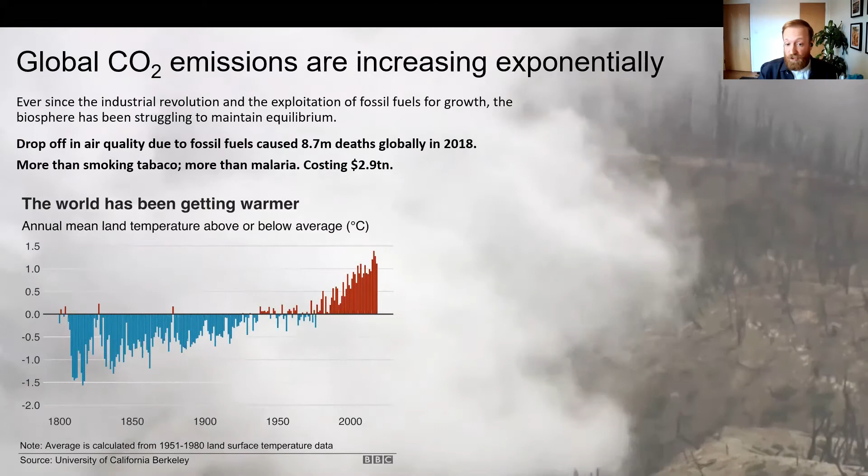When we talk about transport, this can be anything from personal transportation, so how you get around in your car or on public transport, all the way up to your international flights for your holiday in aviation, but also freight, so on the roads through heavy goods vehicles or in international shipping.

Because of this big problem, because the government is signing up to these ideas of reducing emissions, the UK industrial strategy has 4 grand challenges, and one of those has been set as the future of mobility.

Through the future of mobility, we're looking at exploring reducing emissions through new technologies such as lithium-ion batteries and hydrogen fuel cell technologies. Ultimately, we're trying to set the UK as a science superpower in these novel electrified technologies.

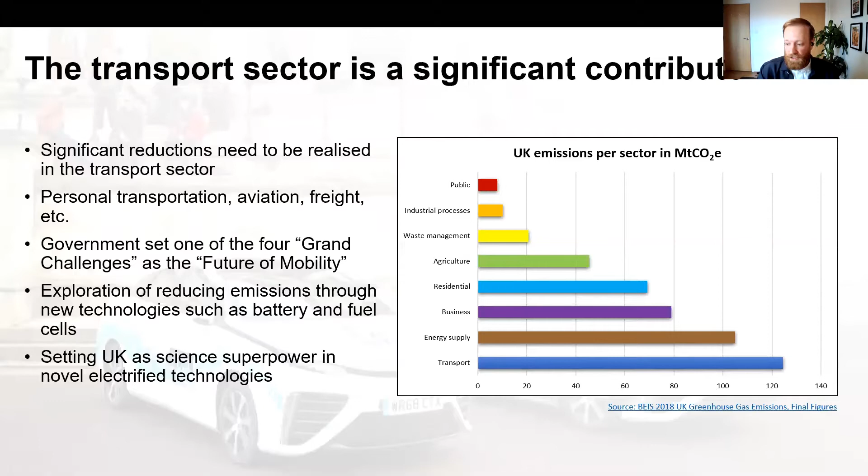I think sometimes we can be quite critical that governments aren't doing enough, but I think we're in a good position in the UK where the government is getting behind these ideas.

We can see that in November 2020, just last year, the Prime Minister announced his 10-point plan for a green industrial revolution. This is 10 pillars of activity that can help us reach net zero targets in 2050. This shows that the eyes of the government are on this issue.

So here I've picked out some quotes from the document that are specifically related to electrification of the transport sector. Some of this you might have heard of in the news recently. There's the ban in 2030 of petrol and diesel cars.

This basically means that in 2030, it will be illegal to sell cars in the UK that are 100% powered by petrol or diesel internal combustion engines. They must have some kind of significant hybridization. So plug-in vehicles will be still available and full hybrids, which is a great first step.

And then a close target after that of 2035, every car sold in the UK must be 100% zero emissions, so have no internal combustion engine whatsoever.

Some of you may think, well, this is a long way away, 2035, we've got lots of time, what's the worry? But if you know how the automotive industry works, if a car company, just pick any car manufacturer, is designing a new vehicle, it will take 5 years or more just to design their new latest model of a car that uses their conventional petrol and diesel engines, where they don't have to think about a new technology. But now they're going to have to think of what's the power source of the future, what's the propulsion system of the future, and do all this in a very short amount of time.

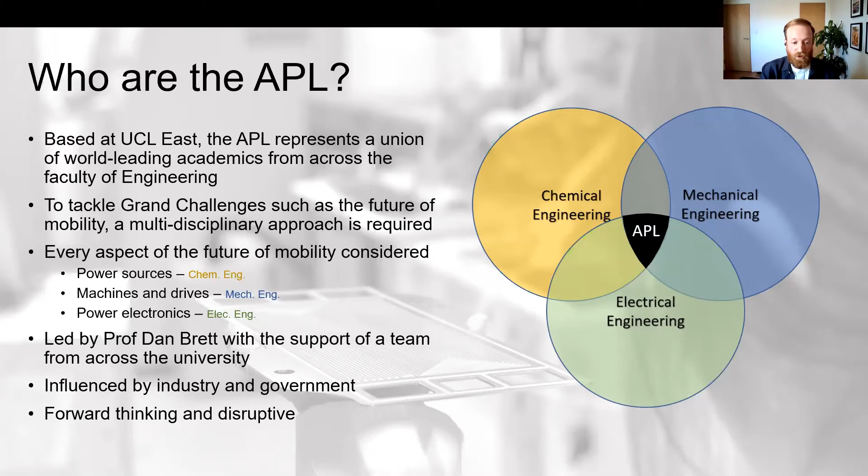And the final point, it wouldn't be UCL if it wasn't forward thinking and disruptive.

So I hope that gives you the overall view of what the problem is and how we're trying to answer it. Now we'll do a bit of a deep dive into some of the technologies that we're currently researching and scaling up at the APL.

As mentioned previously, hydrogen fuel cell work was my bread and butter. This year is my 10th year looking into this research, which makes me feel old, but this is the stuff I get excited about. So we'll have a bit of a deep dive here, strap your thinking cap on. I promise it won't get too technical.

So there's no burning. It's a purely electrochemical energy conversion device. In the middle, you have an electrolyte membrane, which is a polymer, so it's a plastic material, and it kind of looks like cling film, if you didn't know what it was.

What happens here is hydrogen comes in from a compressed gas tank. If you think back to your school days, hydrogen is the most basic element and most abundant in the universe. It's just one proton and one electron.

When this comes into a fuel cell and meets the catalyst area, the catalyst is there to facilitate the reaction. The proton is split from the electron, and the proton can travel through the membrane, but electrons and the gas can't get through the membrane.

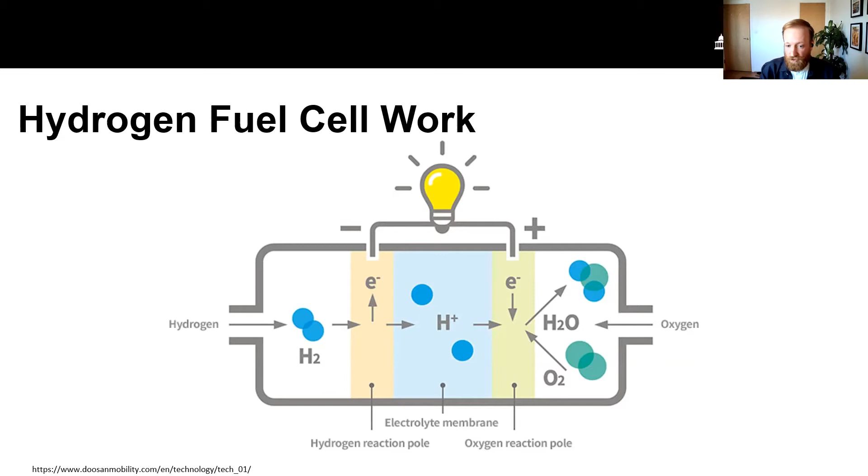And then we spray on either side a catalyst material. This is platinum nanoparticles suspended on a carbon sphere, which is a good way of thinking of this is you think of a black football and you've glued table tennis balls all the way around it. You've got an out of scale but representation of what a carbon sphere looks like with nanoparticles of platinum on.

This is then suspended in something called an ionomer, and we spray this onto both sides of the membrane to make a fuel cell.

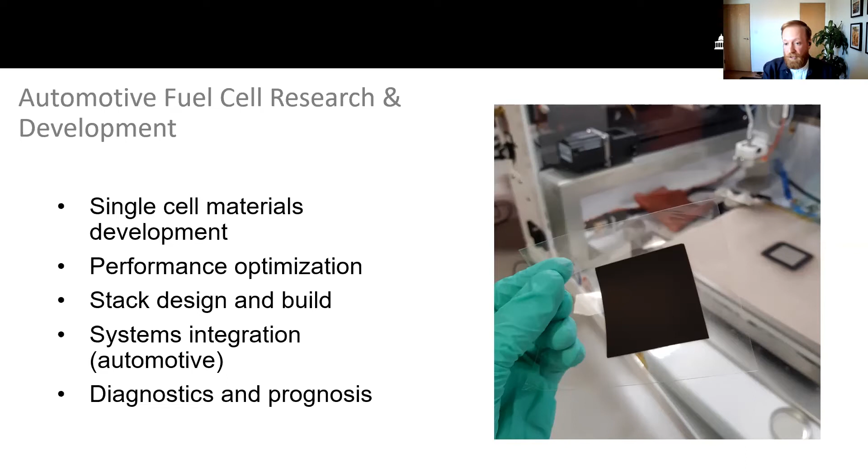So we stack these up same as slices of bread in a loaf to make more connections, and then that voltage that was less than 1 - in this application, where there's 60 or 80 cells, you can get around 60 volts.

And then when you multiply that by the high current that a fuel cell produces, you can then get, I think this one here is about 8 to 12 kilowatts in power. And that's enough to power everything in your home, from your TV, your lights, your kettle, electric shower, and that's how fuel cells could be used.

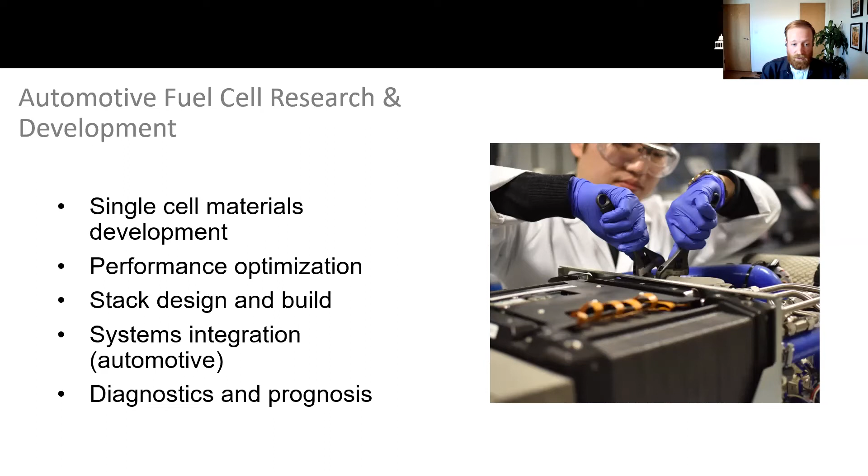The kind of the more global systems engineering level rather than the materials level, and looking at optimizing how do we get the gases in and out, how do we get cooling in, how do we optimize all the fixtures, and that kind of work is what we're quite well versed in.

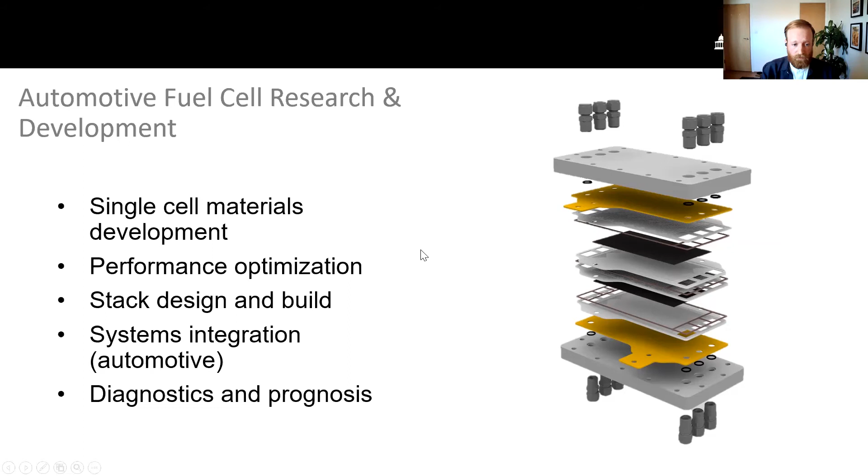Here we can look at scaling and optimizing the balance of plant. This includes the air compressors pushing air into the fuel cell, the hydrogen recirculation system, and the coolant. All of these subsystems that still aren't fully understood, we can tackle at the UCL East campus now.

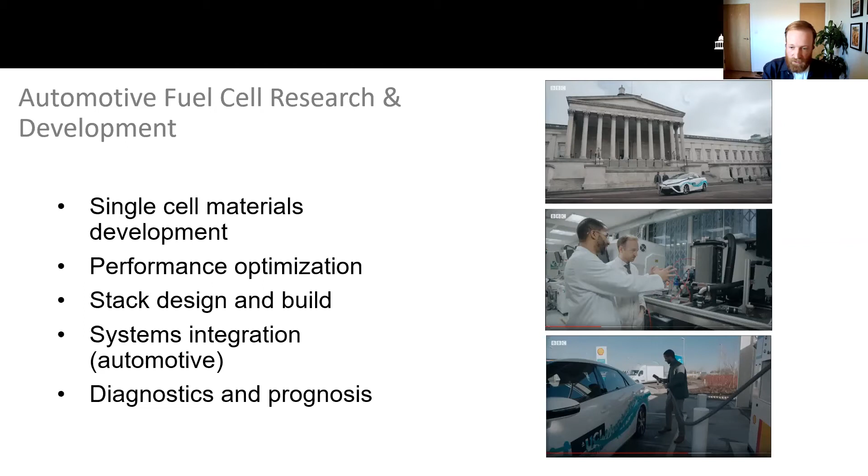So once we've gone from the materials level and built the optimized fuel cell, put it in an application, run it in a system, we also need to look at diagnostics and prognosis. Was the fuel cell running at its best? Did it degrade too quickly? Was it in the right environment? And what we do here is a lot of work with X-ray CT.

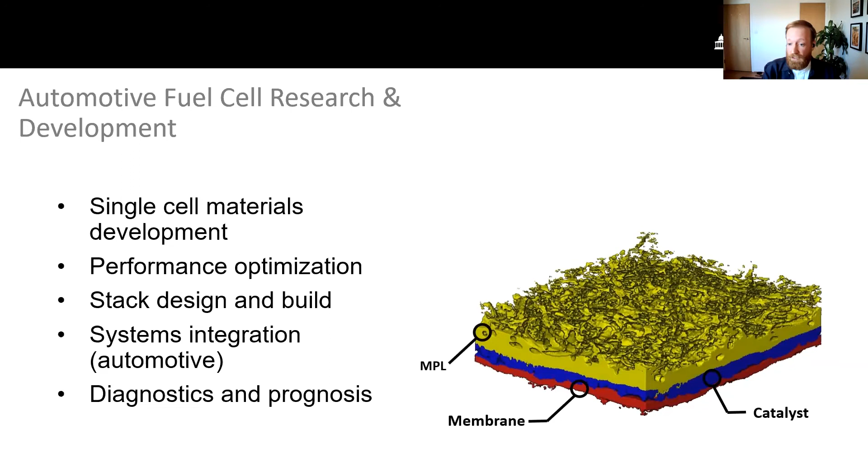So this is an X-ray scan of a fuel cell. This is a very small segmentation, I think it's about 0.5 millimeter cubed. This just shows that we can look, after we've used the fuel cell non-destructively, at the membrane material. Did this crack? Did it get thinner over time? Was the catalyst that we applied, did that move around or delaminate?

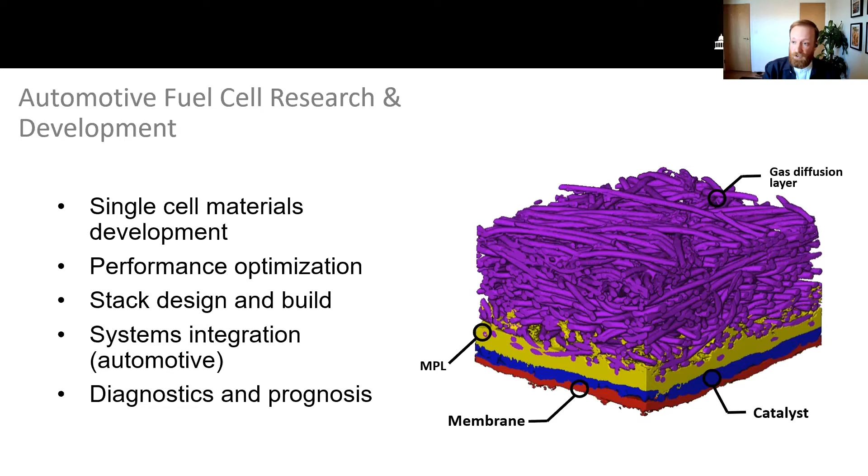And then this here is the gas diffusion layer, which is normally a carbon paper. This is how you blow gas over one side and it diffuses through the fibers to meet the active area. Did this crack? Was this over compressed? And this feeds the next generation, or the next iteration design, for the fuel cell of the future.

So to stay with that thought process and CT, I'm going to give a bit more detail of the recent work that we've done with CT, and a recent paper that we published.

So these next two slides with Homer Simpson, they're brilliant. They were kindly given to me by Dr. Francesco Iacoviello, who's in UCL. He's the X-ray guru, and this explains the process that we use.

Some of you might have come across this before, where you've heard of CAT scans or CT scans for internal medicine concerns, and it's used in the medical field a lot. It's the premise of using a radiation source, like an X-ray tube, passing through a patient in this case, and then at the detector side you can see what's happening inside. We use the same thing to look at what's happening inside batteries, fuel cells, and supercapacitors.

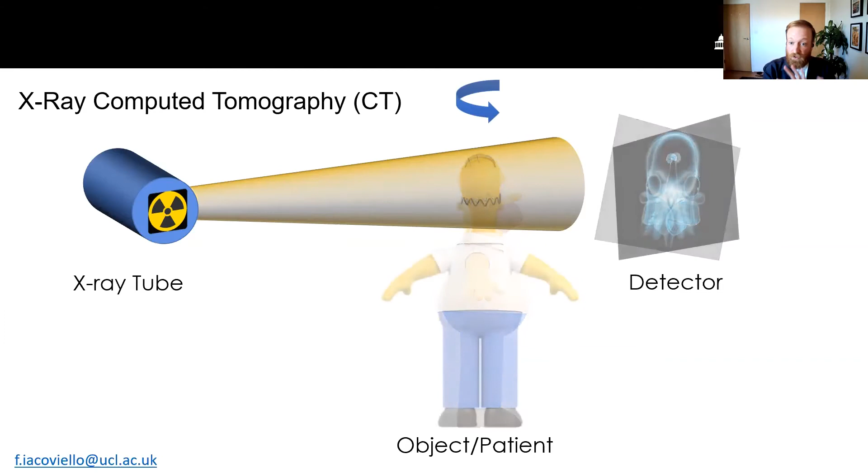But the CT part, so that's the radiography, that's one picture that you normally use for looking at broken bones. But the CT aspect is if you can take one image, rotate the object or patient, take another image, and do this through 360 degrees, you start to build up a lot more data.

Now in a medical context, the patient normally lies on a machine still, and then the machine goes around them. We do the same, but in reverse. So we have the machine staying still, and then we rotate the fuel cell or battery.

So once you've taken all these images, you've got quite a lot of data. We can then use machine learning techniques to reconstruct all these images in a computer environment. And then we have two different ways of looking at this data.

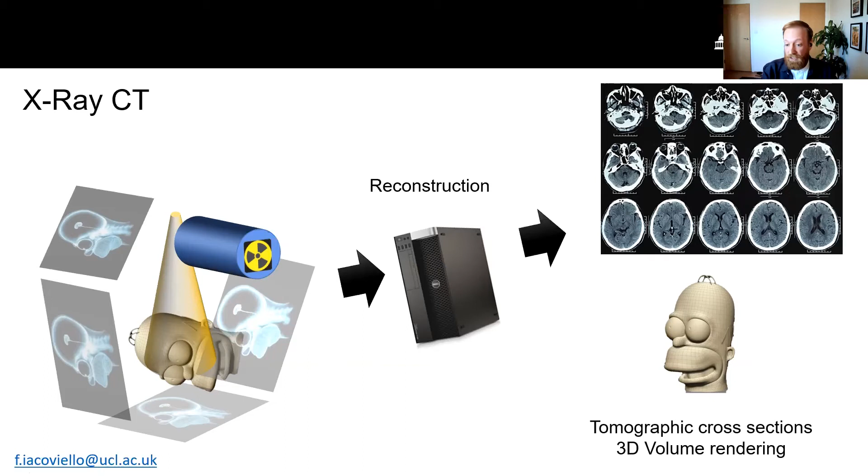So the top section here is something called tomographic cross sections. This is where you can look slice by slice through the thing you scanned, looking at the internals and seeing what's happening. And at the bottom here, we can also stack these all up effectively and build a 3D volume rendering, and that's what you saw previously for a fuel cell.

So I'm going to go on to a paper that we recently published looking at exactly those techniques for fuel cell research.

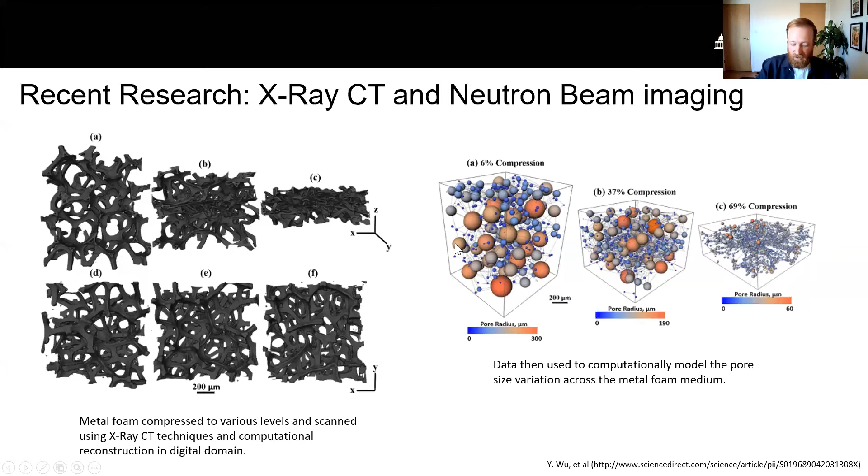If we want to look at how fuel cells operate, such as gases in and out, water in and out, we can do things like computational fluid dynamics, or CFD. This is a technique where you can use the model that we scanned in a digital domain to model how fluids, whether gas or liquid, flow through your material.

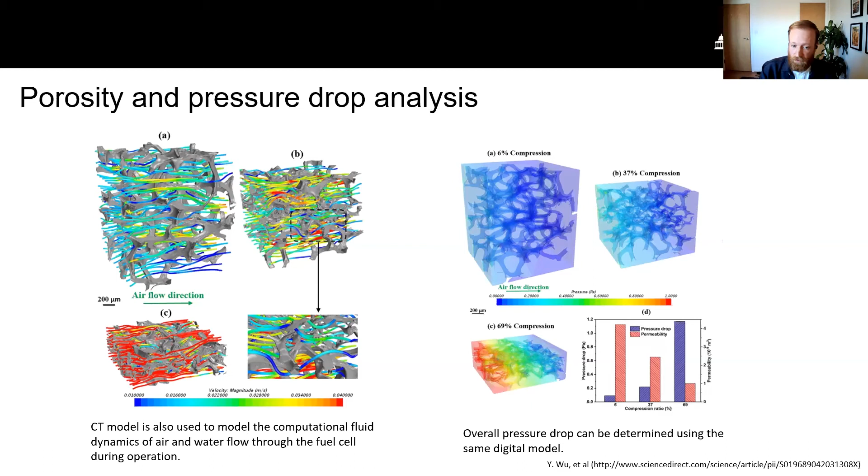So that means, yeah, you do get more performance out of the cell, but then your balance of plant systems, like the air compressor, has to fight a lot harder to push these gases through. So there's this fine balance to be had in fuel cell systems engineering.

We recently took a group of researchers to this nuclear reactor. You have to be at a nuclear power station. And then we tap off a supply of neutron beams, these high energy beams, that can pass through your object of interest - so ours is a fuel cell or a battery.

The great thing with this is it's such high power, such high energy, that they don't really interact much with the metals. So you can put an entire fuel cell in there, an entire battery pack, and the neutrons will only really interact with the water molecules. And because fuel cells make water, we want to see where they make water - are they making too much of it? So this is a perfect technique to use for fuel cells.

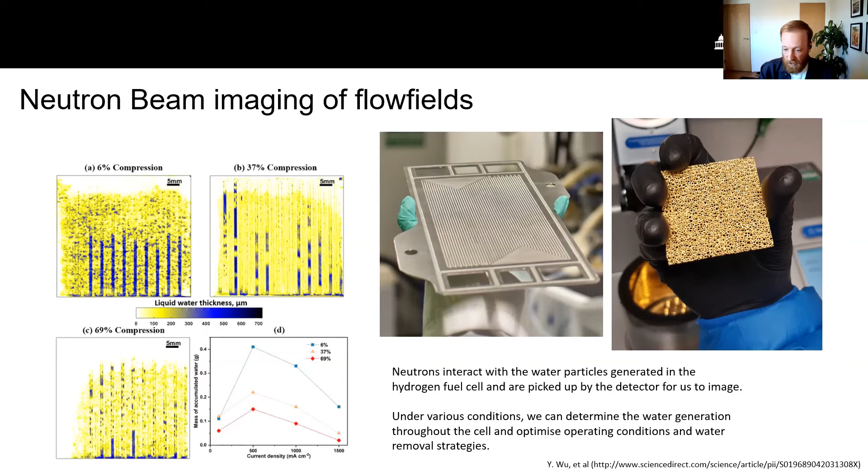So if you've got any more questions on that kind of work, and you're interested to hear more about the novel fuel cell work we're doing, the link to the paper is there, and feel free to get in touch. But that is the small scale.

That is from the nanoscale up to the single cell work. But as I mentioned, we also do systems work and industry-facing work, and this shows a recent interaction we had. We were approached by Hyundai to launch their new fuel cell car, the Nexo.

Through this project, we wanted to show that fuel cell cars during operation don't emit nasty particles. Interestingly, fuel cells, because they have an air feed, need to have an air filter. So what we were trying to show was that fuel cells, when you use them, don't only not emit carbon emissions, but they actually clean up as you drive because of this filtration system.

So what we did is we looked at these numbers here, PM 2.5 and PM 10. That's basically particulate matter that measures 2.5 microns or 10 microns in diameter, and these are the emissions you get in local areas that are severely damaging to health, and the reason why quite a few streets in London are over the limit set by the World Health Organization for these particulates.

So this is me before lockdown, before the beard, putting PM 2.5 and PM 10 into this big ball. Almost like a dirty crystal maze, we had this carbon-infused sphere at the front of the vehicle. When we ran the car, it consumed the cloud of soot at the start, and then at the back of the vehicle, it emitted just water vapor and clean air.

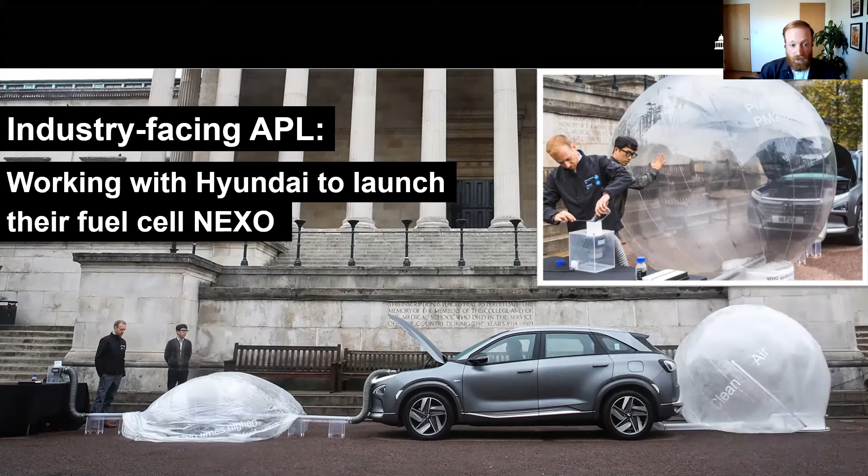So this next section is - hydrogen fuel cells is my bread and butter, as we've mentioned, so I've done a bit of detail on that. But I should also mention the work we do with batteries, which we do quite a significant amount on. And the principles are quite similar - they're electrochemical devices, with anodes, cathodes, and separators.

It's very similar, but where they differ is fuel cells have to have a constant stream of hydrogen on one side and air on the other to keep producing electricity, whereas a battery has everything contained within. It doesn't need a fuel - everything's within the cell. They wrap these anodes, cathodes, and separators up into a roll in a canister, which you might have seen in some batteries, or in a pouch. But basically, it's the same kind of functionality.

But the work we do with batteries, just to take a snapshot, is the same as fuel cells from small level to big scale, and this is some examples of the work we do with battery safety - examples of where batteries have gone wrong. Unfortunately, because all of the reactants are stored within a battery, which is great in some instances, in some safety concerns it's quite severe.

So if you think back to your school days again, this is the last time I'll ask you to do that - the fire triangle. Everything you need for a fire is an ignition source, an oxidant, and a fuel. All of that is within the battery. So even if you think, such as with NASA - we work with NASA on some projects for battery safety - if they want to send batteries onto the space station or into space, you'd think, well, you can't have a fire in space, there's a vacuum. But because everything's contained within a battery for a fire, you can still have problems up there.

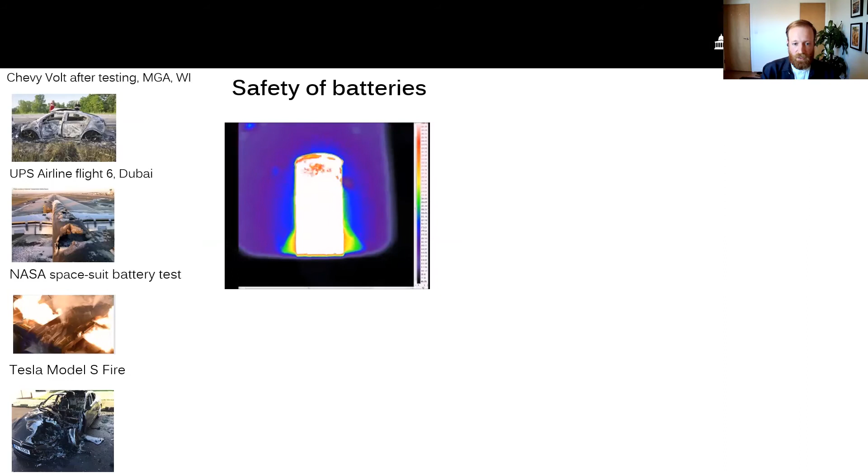This video looks pretty cool, it's great, but how much data can we get out of this experiment? We married this up with high-speed radiography. This is the same battery as the one shown above, slowed down around 30 times, showing that as you get these degradation mechanisms in a battery, and as the materials start breaking down, you get short-circuiting, the temperature increases, and this propagates and propagates.

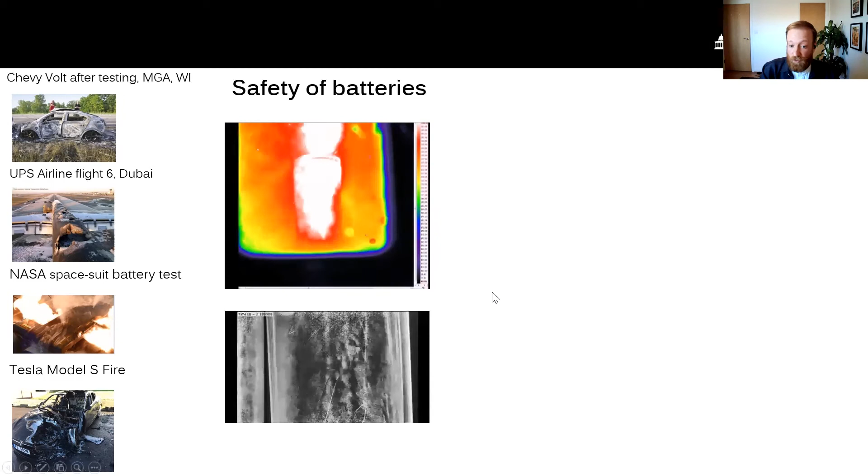Until ultimately, in the space of one second - this video is in real time - you get this violent eruption. And this is not what we want.

So this, again, is how we use some of our CT capability that we have in-house to look at what happens inside batteries and fuel cells.

We have 3 different scales. We have a macro CT machine that can go down to 8 microns in resolution, where we can put an entire battery or fuel cell into the machine and have a look inside. If we want more detail, we have micro CT machines where we can look at a resolution of 0.36 microns, and look at individual layers, so an anode and a cathode or the separator, and see what's happening on those levels.

But if we want to go crazy, we can go down to the nanoscale CT machine, which has a pixel resolution of 63 nanometers. To put that into context, that's about a thousandth of the width of a human hair. This is where we can see on a very tiny scale what's happening with individual bits of a sphere of carbon or a catalyst material.

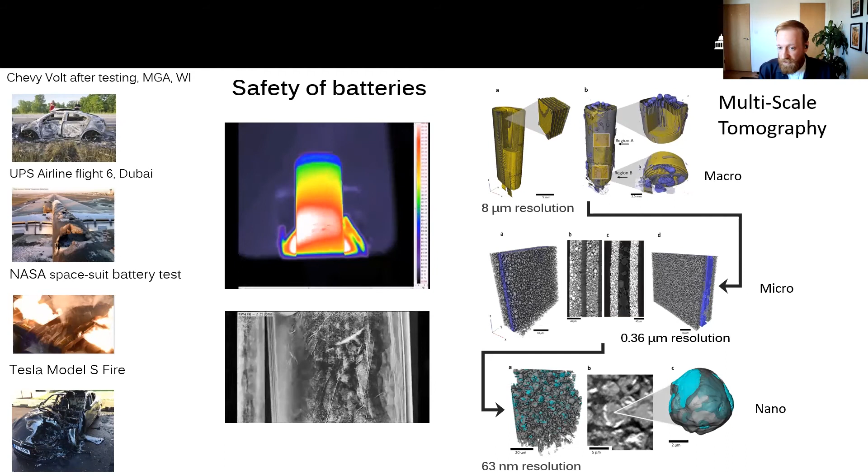As I mentioned with fuel cells, we do work from the fundamental level to higher systems levels. This is an example of work by one of our promising researchers, Robert Mather, who's working on battery management systems, trying to operate batteries in a way that we can avoid those spectacular failures.

Some of the work we do here relates to batteries called 18650s, which is just a designation of how big they are. This is a very common battery - if you think of a Tesla electric car, they actually have up to 7,000 of these individual batteries linked up underneath the car. You don't want one of those going wrong, because they have a chain reaction that would take them all out.

So in an ideal world, you'd put a temperature sensor and a voltage and current sensor on each cell, so you know exactly what's happening across the pack. But unfortunately you can't really do that because of cost concerns and the amount of space you have in the system. So what this research has been looking into is these little Hall sensors.

These are very inexpensive sensors that can be picked up for a matter of pence. He's integrated these into a PCB, a printed circuit board, and then we can have an individual map of voltage, current, and temperature across each cell. This is a module, but if you scale that up to a pack, you could do it across the whole pack. This gives us a lot of data to show what's happening inside.

We've verified this with thermal imaging. So we can say, oh, it looks like through using our new BMS, cell 8 is doing a lot more work than cell 1. And when we actually look at this from a thermal camera, we can see there's a lot more heat on one side than the other. How can we stop that? Because that means the hot cells are going to degrade quicker than the other cells - making the battery pack of the future a bit more optimized.

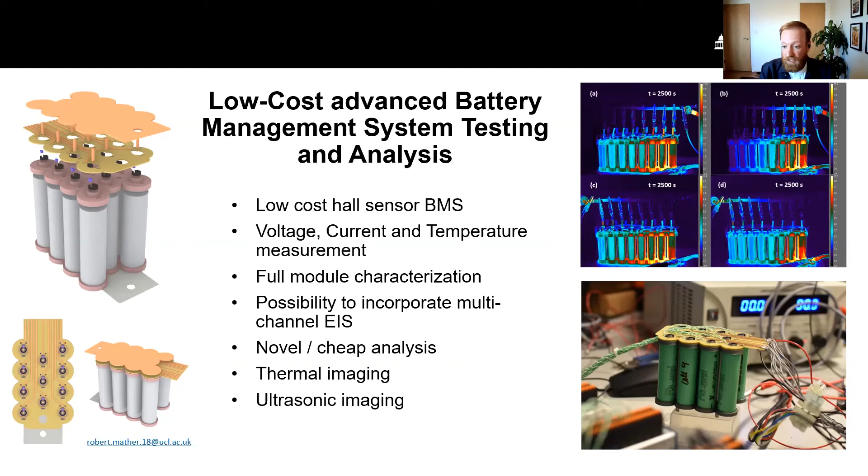So just to give you an idea of the scale of the team so far, the APL was made up of 3 departments, and this is the representation from the chem eng side. There's a large group working on batteries, fuel cells, and supercapacitors. We're at saturation point now on the Bloomsbury campus - we've filled the labs with people and equipment, and thankfully that's why the Advanced Propulsion Lab is a great opportunity.

As I was saying, we're growing, we're expanding. The work we can do now in Bloomsbury is restricted to a lower TRL, or technology readiness level, because large battery packs - like 7,000 batteries in a Tesla - or a fuel cell stack, which is very large, about the size of a filing cabinet, we can't actually do in Bloomsbury.

The electrochemical side of the APL is already more than 90 researchers strong, representing more than 400 papers published in leading academic journals, and more than 7,000 citations. Interestingly, over £40 million of funding has been realised through the Electrochemical Storage Group since 2011. And to show our industry acumen, we've had 2 companies spin out with new technologies we've developed in the labs, who are doing really well.

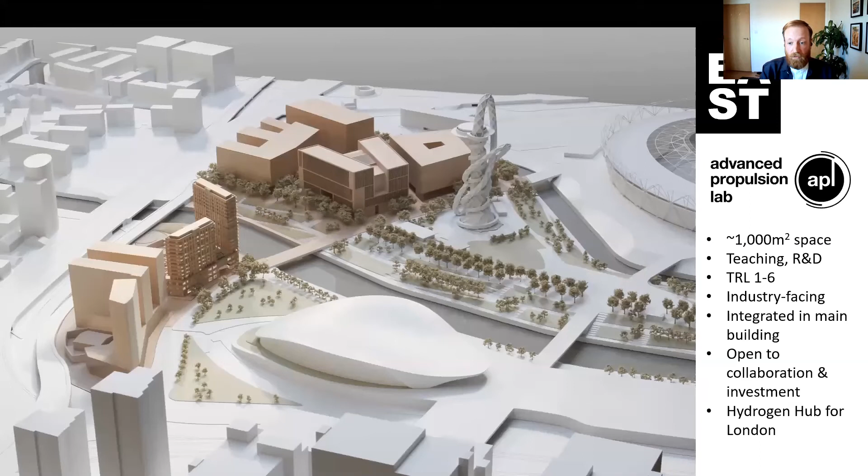So as I mentioned, we're growing. The need for these kinds of technologies from government and industry level, and the interest we have, is growing, but we don't quite have the space in Bloomsbury. So that's why, fortunately, the APL was selected as one of the entities to go out to UCL East, the new expansion project. Here we can see the architectural model for the campus site itself.

The APL is going to be occupying a wing of the 8th floor of the Marshgate building, which is coming out of the ground now. You can go on the UCL East website and see some cool pictures of the skeleton of the buildings up. The APL is going to have around 1,000 square meters of space to look at teaching and R&D, accelerating the technology readiness level from the lower levels, which will stay in Bloomsbury and carry on prospering.

But then we can scale up and do big battery packs, big systems, big electric motors, putting these into actual vehicles. The important thing about this is it gives us more opportunity to work with industry on these higher TRL technologies. We can talk to companies who are looking at hybridizing their fleets, or who want to develop new technology to decarbonize an application they have. This is exactly the kind of work we're looking into.

In fact, my daily role now is to talk to companies and government about how we can forge these partnerships for mutual benefit. Interestingly, we've had some good discussions recently about extending the APL's activities to a hydrogen hub for London.

This is because we're in such a great position on the East Campus to benefit from the local waterways. So can we look at using these to test marine applications, or even ship in hydrogen that's been generated by wind turbines on the East Coast into London?

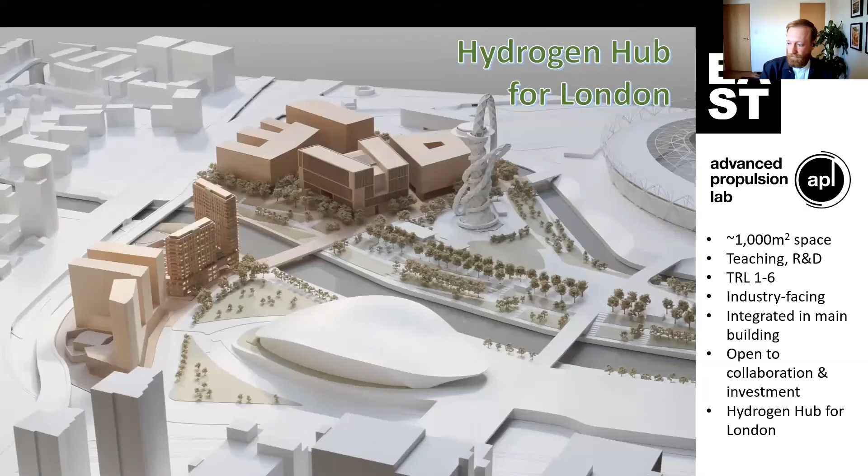So how can we make a difference at UCL? I hope I've made it clear there's a global concern, a big issue with climate change. The United Nations Sustainable Development Goals have shown the key areas the UN is interested in, and these directly influence things like the UK government's industrial strategy, which is looking to develop four grand challenges. The main two related to APL are the future of mobility, obviously the main one, and clean growth.

Where we can help as UCL is, like I mentioned, we are not on the back foot with this technology change. We've been doing this for over a decade. We are well versed in these technologies and work with industry partners across the globe to develop them, and these industries are now changing with government support. It's all coming together to show UCL could be at the forefront of this green industrial revolution and benefit from being one of the leading lights in the development of electrification.